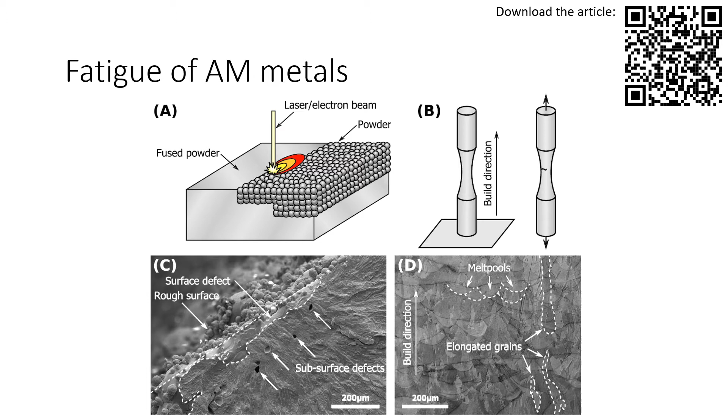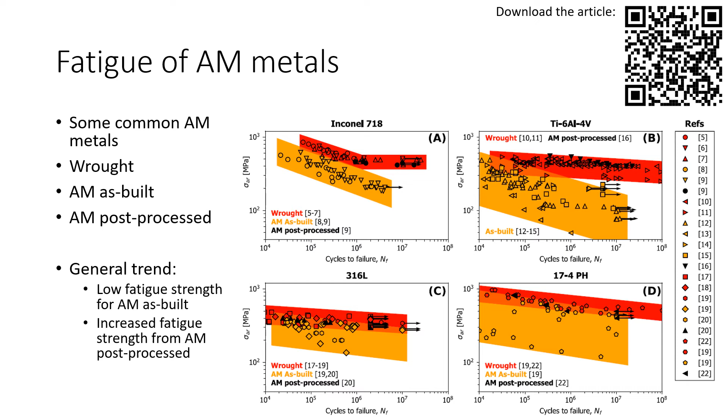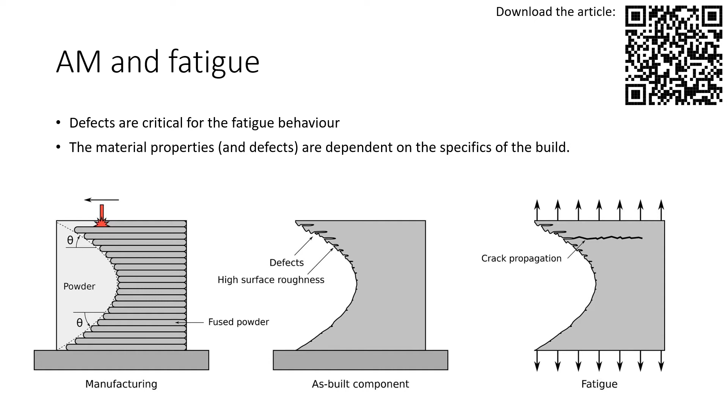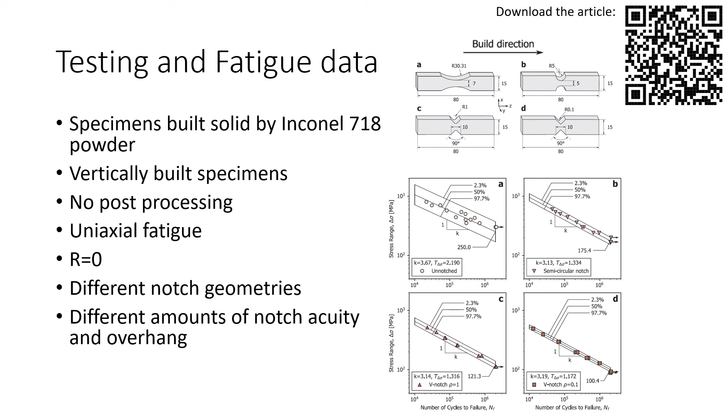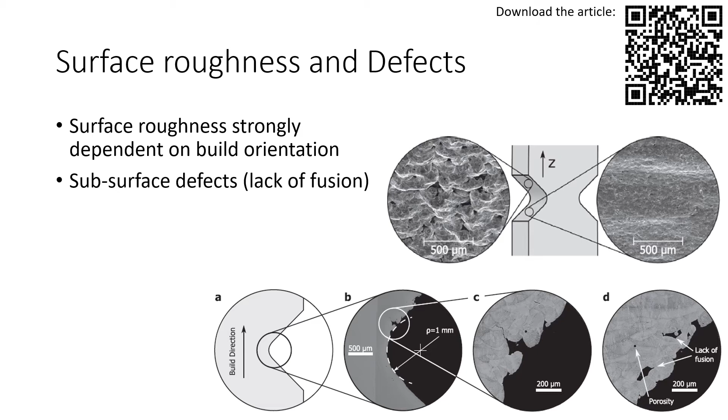If we analyze the different surfaces, what we see is that the downskin surfaces are rough, while the upskin surfaces are kind of smooth. And the lower picture here is a polished cross-section from one of the V-notch specimens subjected to 2 million cycles of loading. And what we see is that the fatigue crack does not initiate from the notch root, but from a defect in the downskin region.

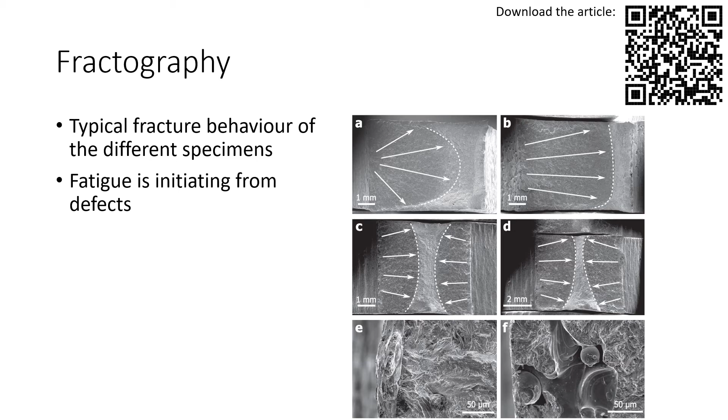And these are some typical fractographs from the different specimens. We see that the unnotched and the semicircular specimens are having fatigue initiation from one side, while the V-notched specimens in C and D have fatigue initiation from both notches. And in E and F we can see a comparison of the typical defects found in an unnotched specimen in E and in a notched specimen in F. So there are larger defects in the notched specimens due to the orientation of the surface. And we can see some unmelted particles, what we can characterize as lack of fusion.

So we did a further analysis of these defects, and we captured all the fracture surfaces and measured the defects as well as we could. Of course, it's a bit difficult when the surfaces are not completely straight, but we measured the defects, and in the upper plot the defect size is reflected in the marker size, and then in the lower right figure the defect size is plotted versus the position within the confidence bands.

So we see that for short fatigue life we have large defects, and for long fatigue life we have small defects, and this trend is strongest for the unnotched specimens.

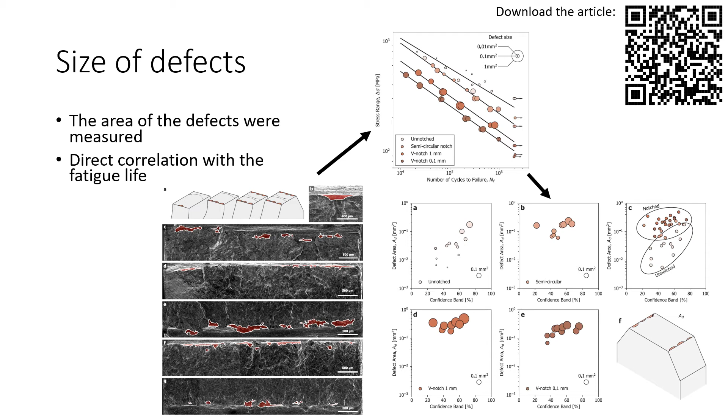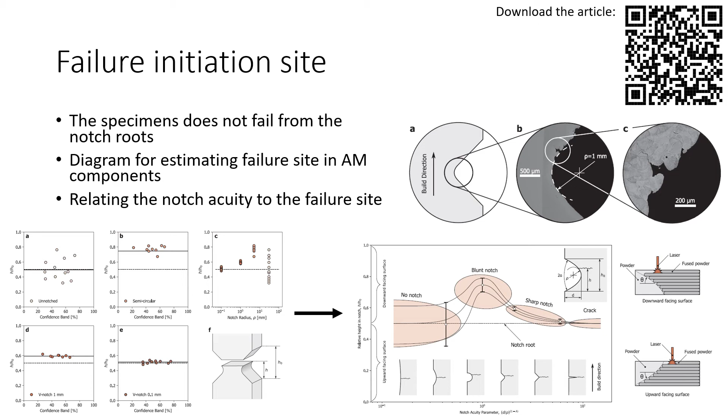And further, we captured the failure initiation sites for the specimens, and what we saw was that unnotched specimens have a large scatter, while the semicircular specimens are failing from the downskin region. So do the V-notch specimens with 1 millimeter radius, while the V-notch specimens with the sharp notch have failure from the center. And then we put this into a diagram using the relative height within the notch and the notch acuity to describe it, and that's shown on the lower right, this diagram.

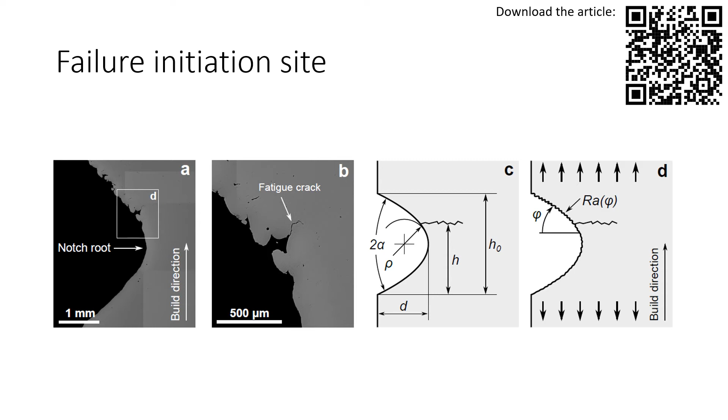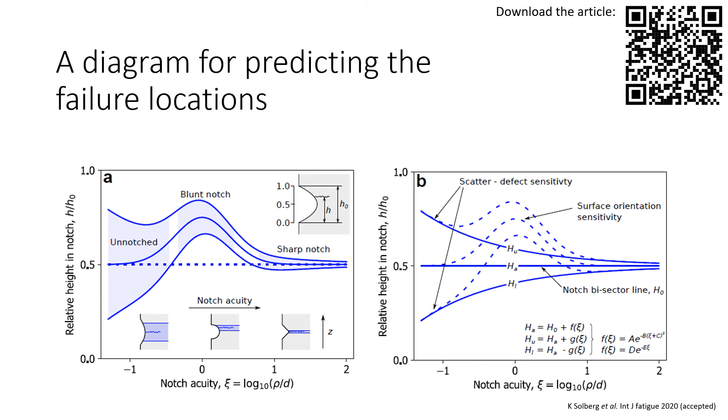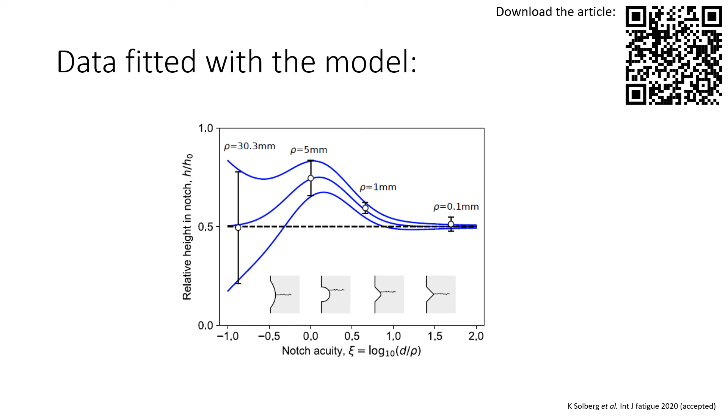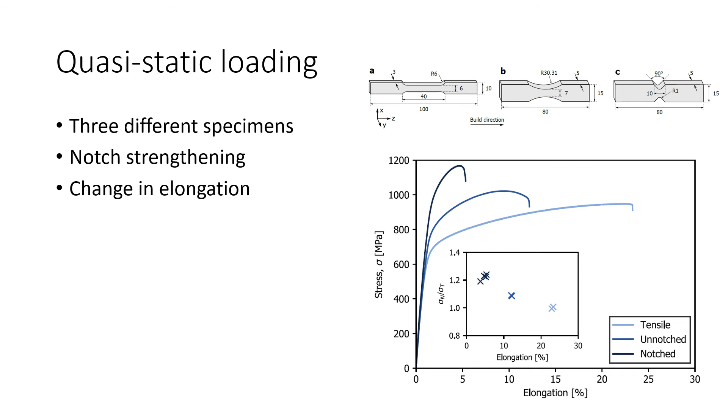And then we also did some static loading. We tested 3 specimens, also including one tensile specimen. And for the notched specimens, of course, we had the notch strengthening effect and lower elongation, while for the tensile specimen we didn't have the notch strengthening effect and had longer elongation.

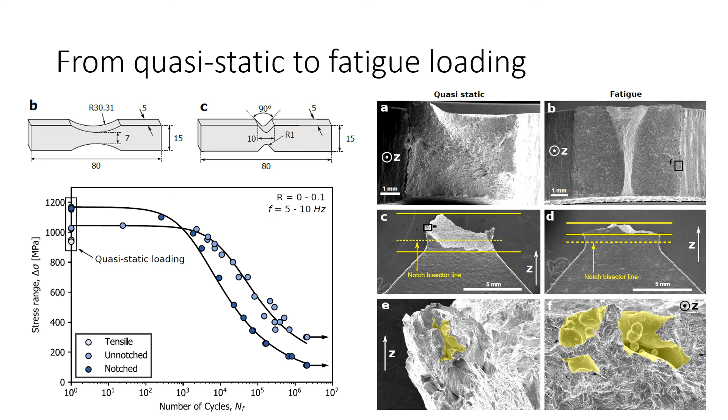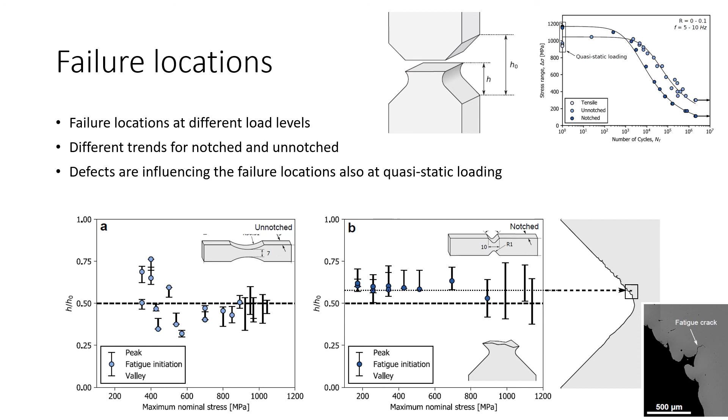Okay, so conclusions. Notch weakening is observed in fatigue loading, and strengthening is observed in static loading. Fatigue cracks do not initiate from the designed notch root under fatigue loading, but from defects. And the defects and higher surface roughness are present in the downskin region, causing this. And the failure locations are focused towards the minimum cross-section in static loading. However, the defects are still influencing the failure location at static loading.